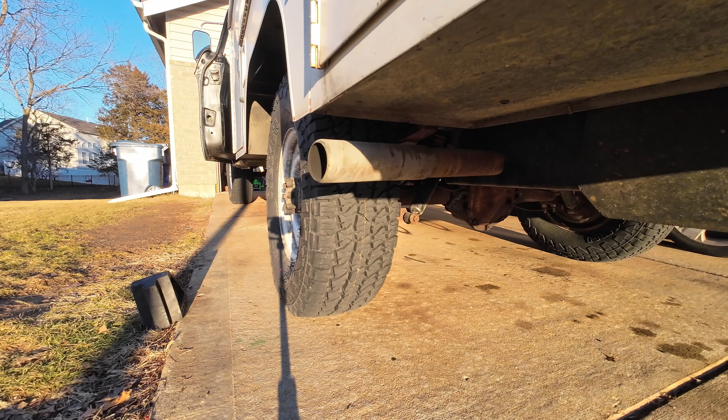All right, so you want to weld up some exhaust, whether you're just going to butt weld them, you're going to weld them in the slip joint, or you're going to weld some kind of hanger or something on it. Quick little video to kind of give you some pointers on how to weld all this stuff up without blowing through it and, well, get you building that exhaust.

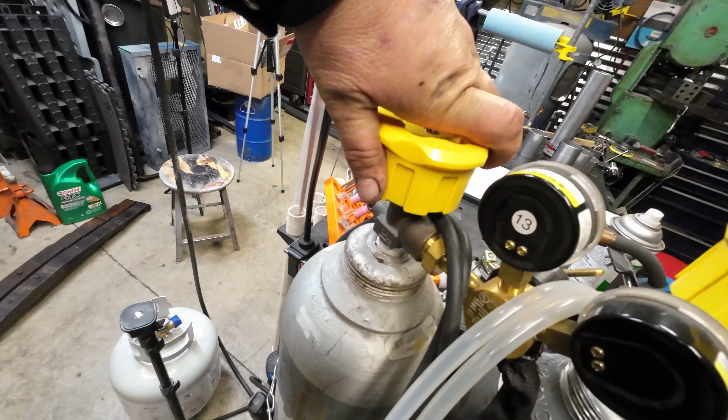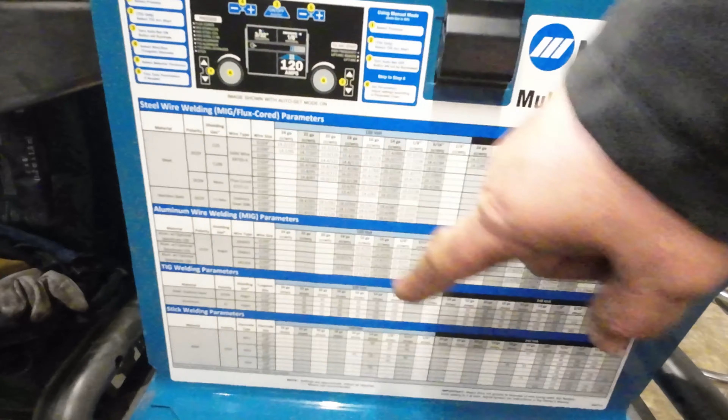Now every welder is going to be a little different, but most of them have this chart. You pick what kind of steel you have, what kind of wire, and then what kind of material, and then you can pick from there. Just follow your chart. But if you don't have a chart that you can go by, how do you figure this out? Well, let me show you.

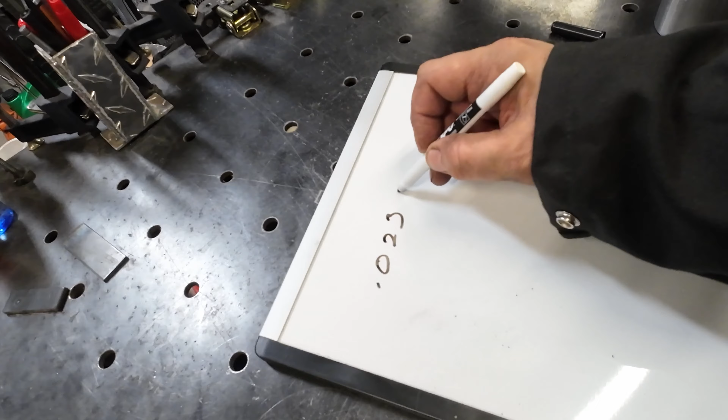So every wire has a burn off rate. So as you're welding, you need so many inches per minute of wire to burn off. And you see here in this little chart, it'll show you the different burn off rates for each wire. Now there's gonna be a little math, but it's minimal, promise. It's .023 wire, and it has a 3.5 inches, I'm gonna call it burn off rate, .050 thick material. And now you're gonna have 1 amp for every thousandth of thickness.

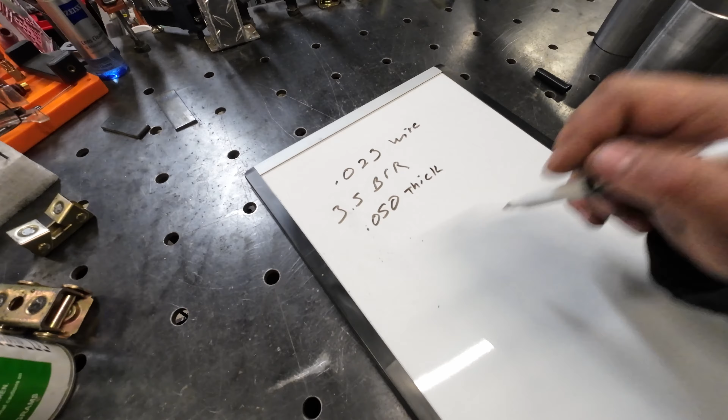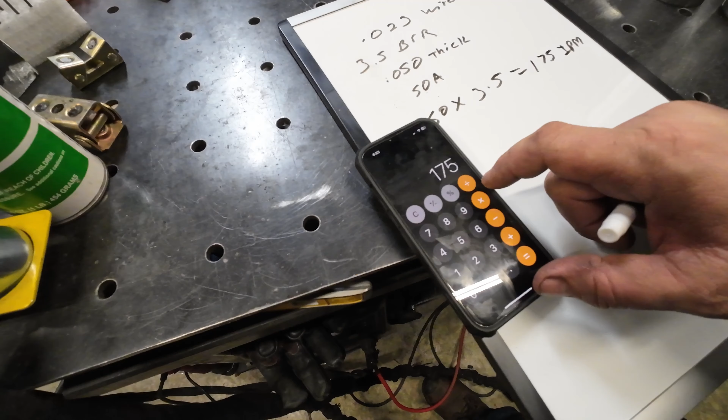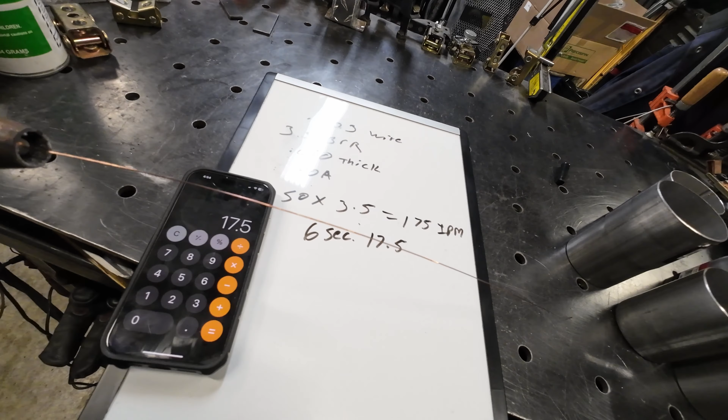Easy, 50 times 3.5, 175 inches per minute. So if we divide that by 10, so in 6 seconds, we would have 17.5 inches of wire. You would just let this feed for 6 seconds, measure it, and as soon as you get down to that 17.5 inches, you know you have your inches right. So just because you don't have a setting in inches per minute doesn't mean that you can't dial it in that way. So that's how you get your wire feed.

Now you can buy these pieces from O'Reilly's, Harbor Freight, not Harbor Freight, I got Harbor Freight on the brain, O'Reilly's or AutoZone. You can buy little short pieces. I buy them a longer piece and I just cut them into what I want them to be. Also, if you're gonna do a lot of welding, I always suggest a little anti-spatter spray.

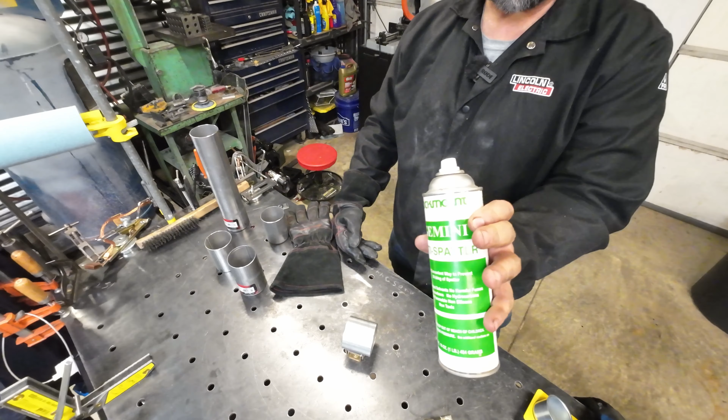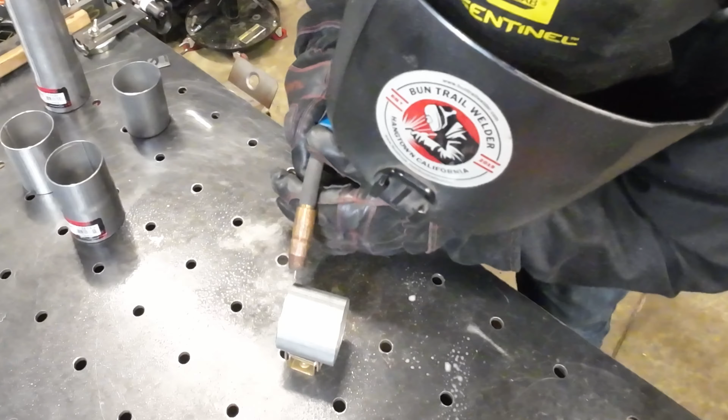And that way, especially if you're running flux core. So how do you know if your voltage is right? Well, let me show you. And you can pull the trigger and kind of adjust on the fly if you want to. But listen to the popping noise. You'll hear it hits and it's got a distinct sound. So you'll hear it as I'm going.

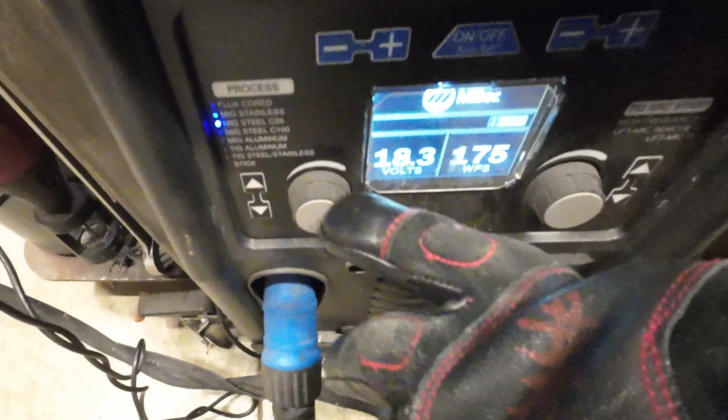You can hear the sputtering and you can really see it in the weld, like a bunch of BBs. But you got to start somewhere. If you don't already have these settings, all you got to do is from here, I'm going to turn up this voltage as I weld with the other hand, and that way I can see where I'm at. You'll hear it as I go. You hear it cleaning up.

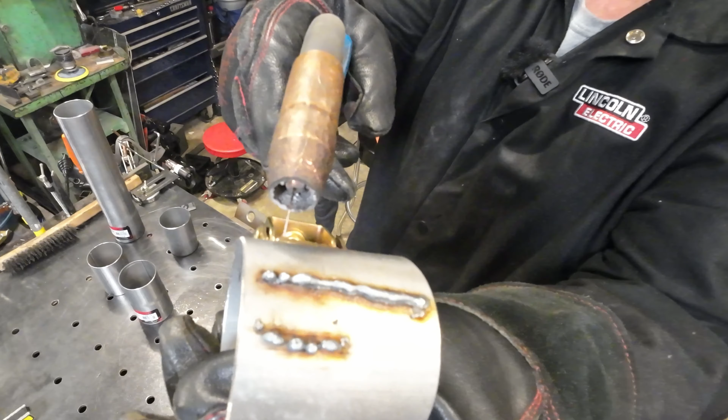Now if you get to the point where you're blowing out, then you know you went too far. So you can see BBs all the way to it's starting to flatten out. Now you want this to kind of be a little flat. You don't want this big hump. So once you get where you think you're at, go up just a little bit more. So I'm at 18, I'm going to go up to 19. All right, so once you've turned it up to where you think you need it to be, lay a bead down.

And after you drop your MIG gun, you'll see how it kind of flattens out. It's kind of running up against that other weld. And what I'm looking for also is some kind of penetration on the other side. So you have to juggle that speed. If you're going too fast, it'll raise up. So as you slow down, it'll flatten out a little bit. Now, it's going to blow through a lot easier in this butt up because you got the bevel and everything. So you're going to have to move a little faster.

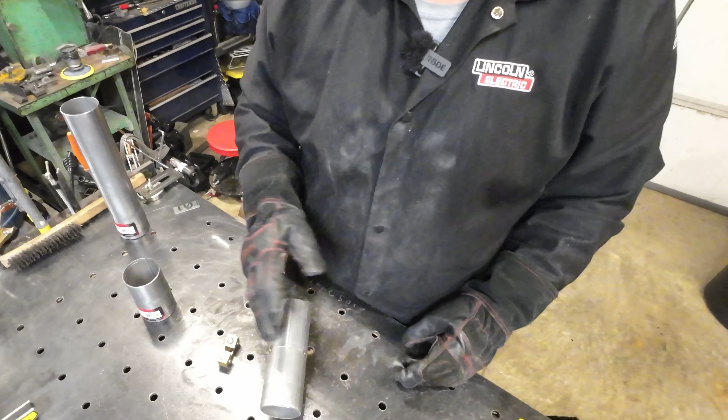Now you're not going to try to weld the whole thing at one time. I might weld halfway and then weld the other half up. So I would run here to here, and then I might turn it and go from here to here. That way this will cool a little bit by the time I get there.

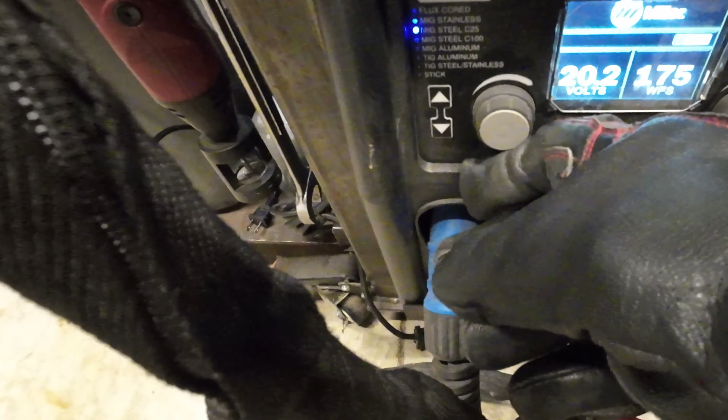Uh-oh. So what happens if you burn a hole through just like that? So I'm running and I pause for a split second, the heat got away, which is a sign that I need to turn the heat down a little bit. I'm going to go down to 18 volts, other way. So the fix is going to be easy. I'm going to not try to fill it all at one time. It's just going to be a little weld, little weld, little weld until I get back to this other side.

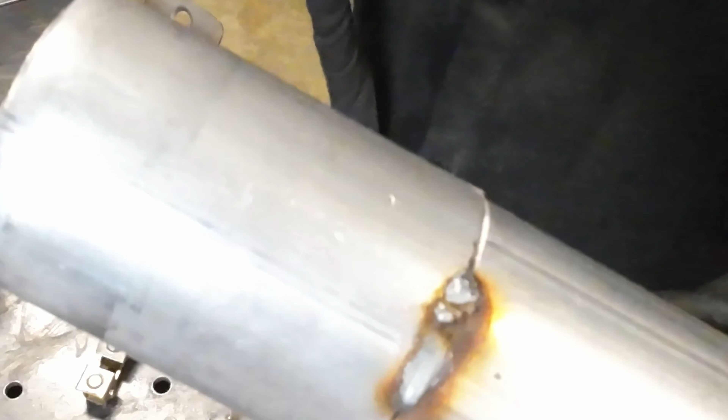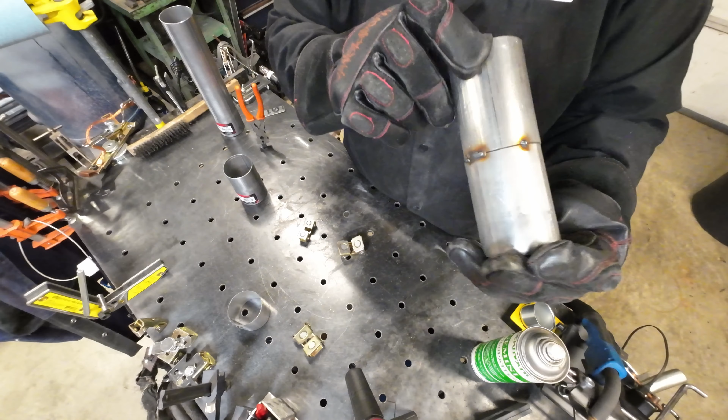So you're filled up. Now I'm going to let that cool, and I'm going to start welding between these two tacks. Practice the weld, right? I'm going to run from here to here. You're just going to run from here to the other side. But what I'm going to do, it's going to be hard to see. I'm going to look inside of there, and I'm going to see if I have penetration, which is what I want. If you don't, slow down just a little bit.

Now, if you're going to take this and you're actually going to do more of a lap joint, it's easier because you don't have to worry about trying to burn through this chamfer. You have some good base steel here now. So when you weld this, you can really manipulate it a little bit more. Now I just slowly work myself around, and you just got to get used to the cadence.

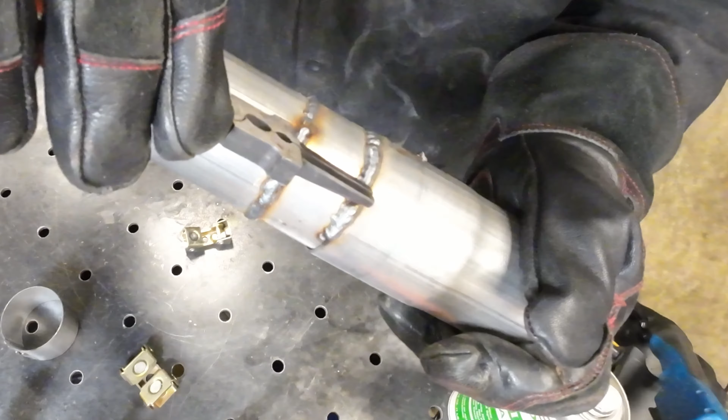Now a little difference what you see here. So I spent a little bit more time on top and the bottom, so I'm doing like a small loop. If you don't spend enough time on the bottom, like if you do 1, 2, 1, 1, 2, 1, you can see how we don't have these nice fine ripples here like we do here. So you just got to kind of get used to 1, 2, 1, 2, 1, 2. You got to find that rhythm.

That's why a couple practice pieces, you see this one kind of flattened out for us. And at the end I came back just a little bit to fill in that sink. We're just going to make do. Let's say this is a hanger. We're just going to weld it onto here. So basically what we're going to do is we're going to just tack this on.

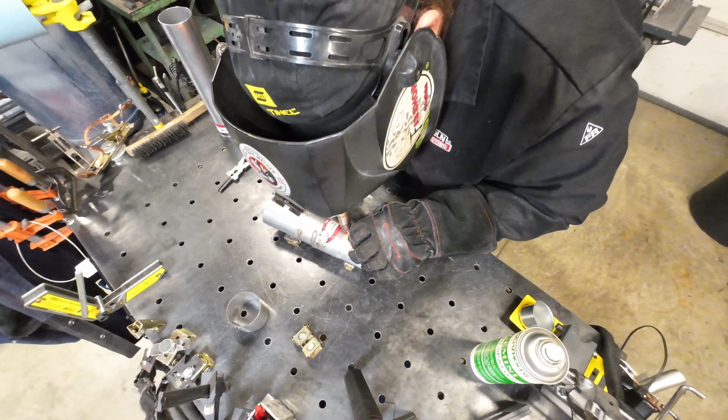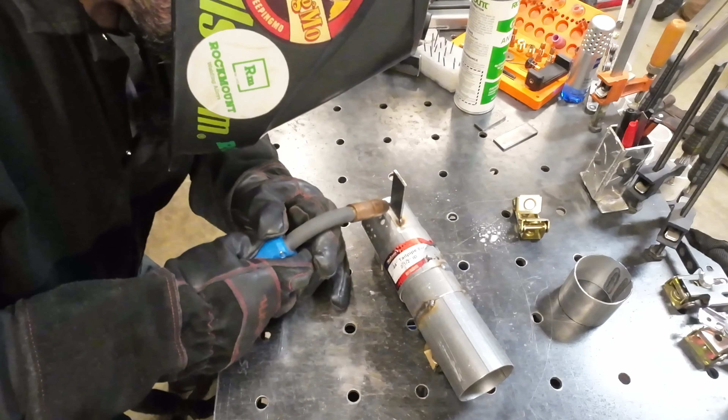The hanger is going to be a little bit thicker, so I'm going to hang out on this thicker material just a little bit more. I'm going to come up, and it's going to be like a curve. So maybe I'll do 1, 2, 1, 2, 3, 1, 2, and then just like a small circle. So I'm going to drive down into the root and out and around. So since I'm welding hard wire, I'm going to push. So I'm going to come down here, stick on that top. Come down, top, through the root, down.

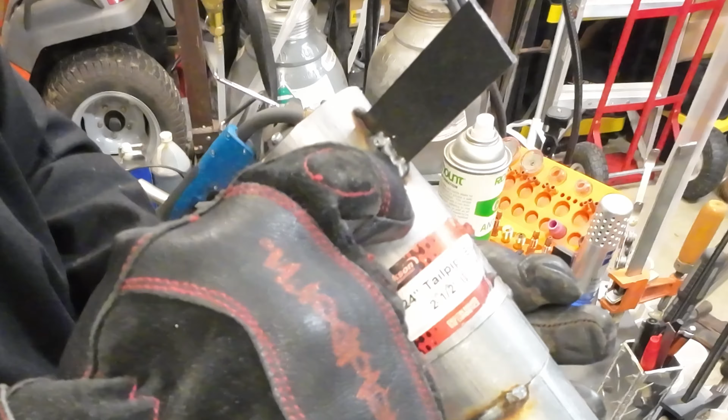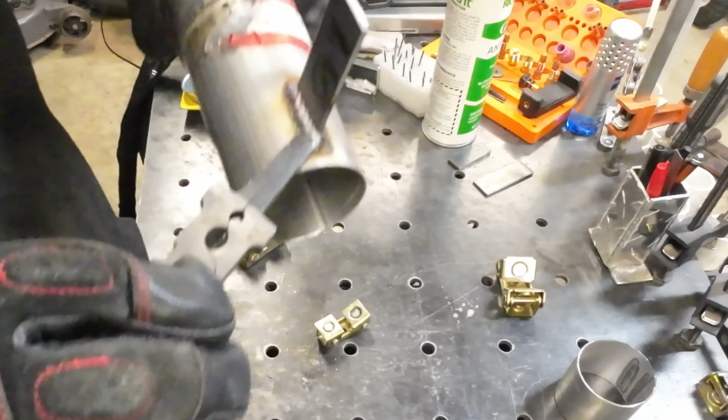Now if it looks like this, you need to spend a little bit more time in the bottom of this. It's looking better, so let's weld the other side now. And you can see that puddle as you go. So as you go through, you just start stacking it. And like right here, I need to hang out just a little bit more on the very end. So you just keep making loops. You can get these little flat pieces at like Lowe's or Home Depot. Just cut them with the cutoff wheel if you need to.

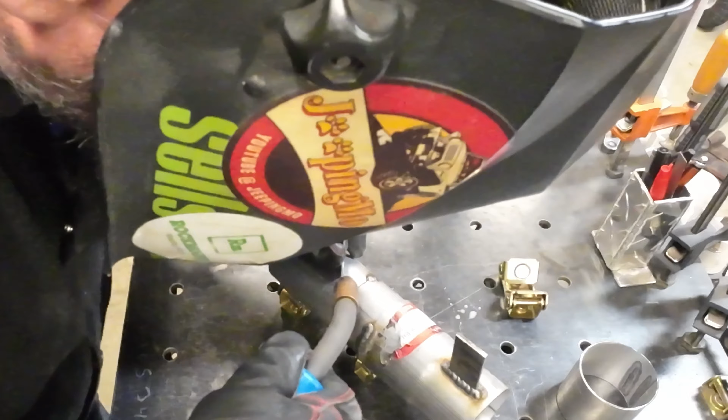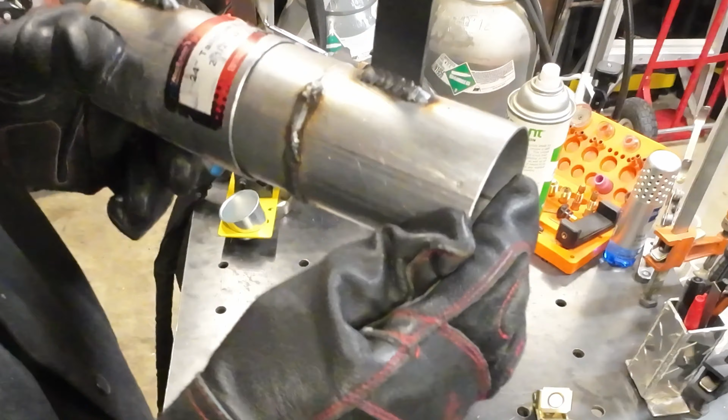I am going to go up 1 volt back up to 19. Hit the corner, and as you start getting your settings better, it'll start looking more and more. You'll start seeing the little scallops in the weld. If you look inside, it'll be kind of hard to see, but you know there should be a little bit of penetration inside of that weld.

Not spending enough time on the bottom of that toe, so I stayed there. I dwelled a little bit more. Start making it a little better. And then here I was getting the cadence down, but I went up just a little bit more. I went up 1 volt, and I went up 5 inches per minute on the wire. And then I think that looks a lot better.